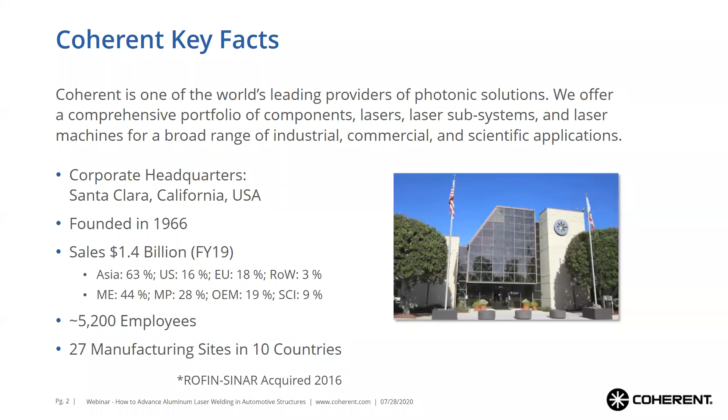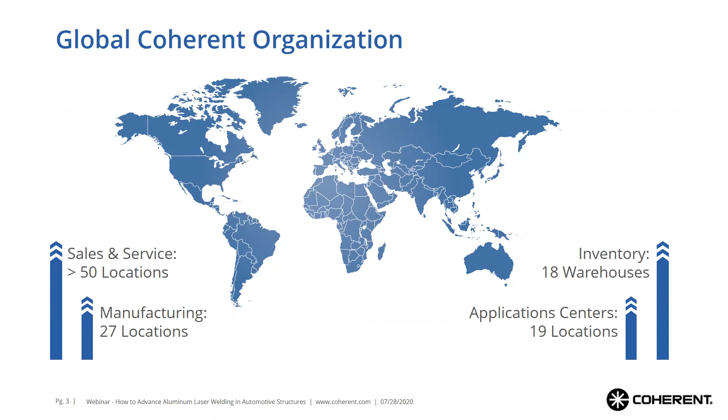So, as I mentioned, we are a large global organization with sales and service located throughout the world with over 50 locations. We currently have inventory warehouses scattered throughout the world to provide spare parts as well as consumable support, as well as 19 application centers located globally. Getting into a bit more detail with regards to these application centers, here in North America, where JP and I are both based, we have 3, we've got 10 over in Europe, and 6 throughout Asia. We perform well over 2,500 applications annually for our customers with over 75 engineers.

The goal of these applications is to provide support to the sales team to make sure that the correct equipment and processes are being selected, as well as helping out both pre-sales as well as after sales. Right, and this also is a location where we prove out our latest and greatest technologies that we are bringing to the global customer base.

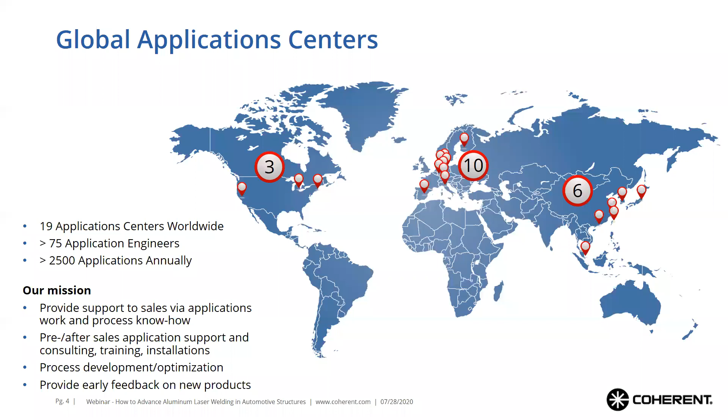Within Coherent, we can cover all aspects of your needs for a laser. So there's the initial sale and support from the applications lab. We have extensive field service that will go out and help you during your install, setup and maintenance of your equipment, spare parts and logistics, technical support. So we're full Industry 4.0 with capability for remote diagnosis, as well as extensive training classes, both at our facility or on-site at your facilities.

There are 4 basic core markets that Coherent works in. There's microelectronics, material processing, OEM components and instrumentation, and then government and scientific research.

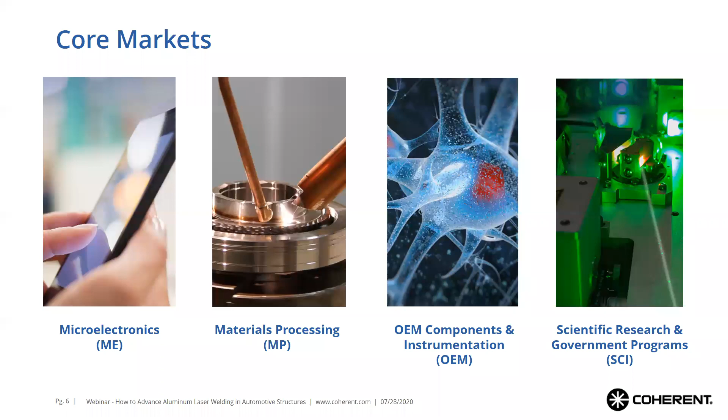Right now, our largest market is microelectronics. We are growing our material processing, and we are considered number one in the market segment for OEM components and government research. What makes Coherent a bit unique compared to many other laser companies is not only the markets we play in, but also our product offering.

In this chart on the left, you can see we offer all sorts of laser technologies, from gas lasers, diode lasers, solid state lasers, fiber lasers, down to full systems. Across the various core markets we work in, we have multiple solutions. When you come to Coherent, we help make sure the correct technology and process is selected. Especially with new materials, there's more than one way of accomplishing this goal, but working closely with the customer, we can tailor the solution to meet all your requirements.

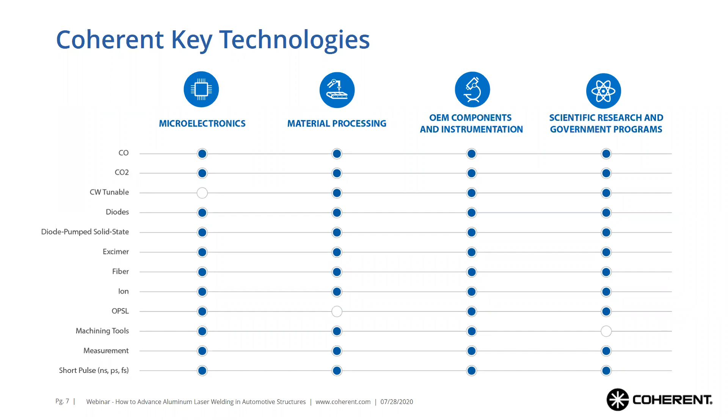What's key here is process and application knowledge is critical. That ties back into our applications lab, where we have the experience and knowledge that we can pass on to our customers.

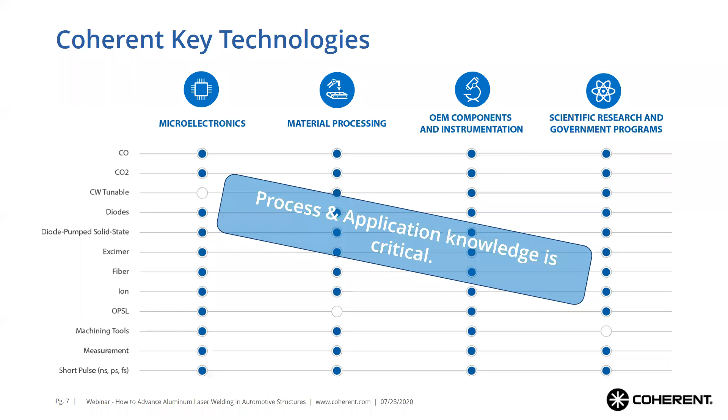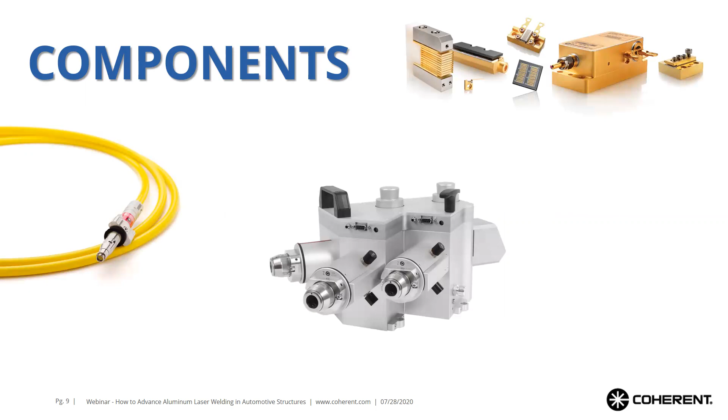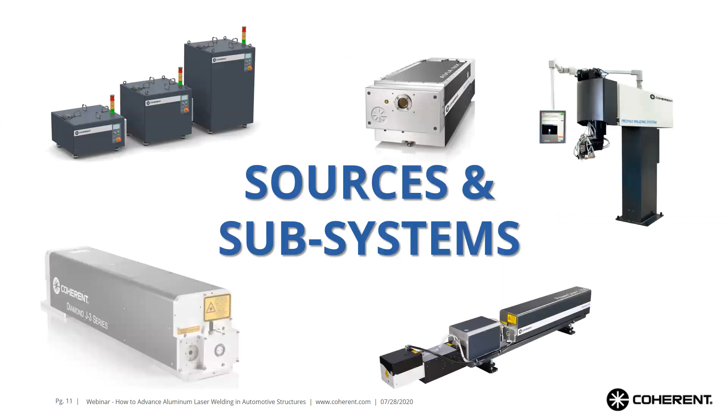With this broad portfolio that we offer, here's some examples. Down at the components level: individual diodes, fiber delivery, switches. We offer the individual components. We also offer sources and subsystems - individual lasers, lasers with optic delivery that can be integrated into a larger line, as well as complete turnkey systems.

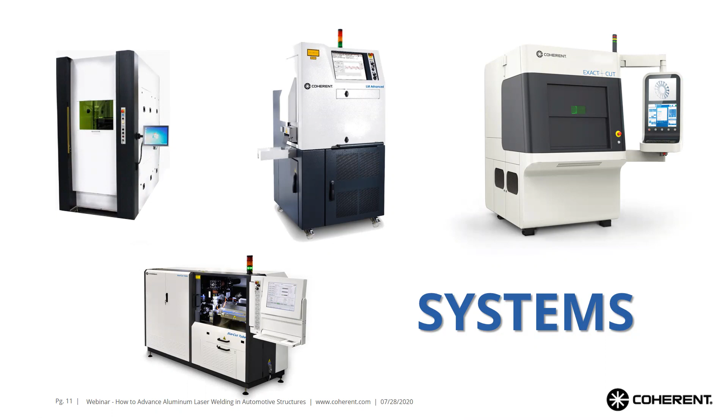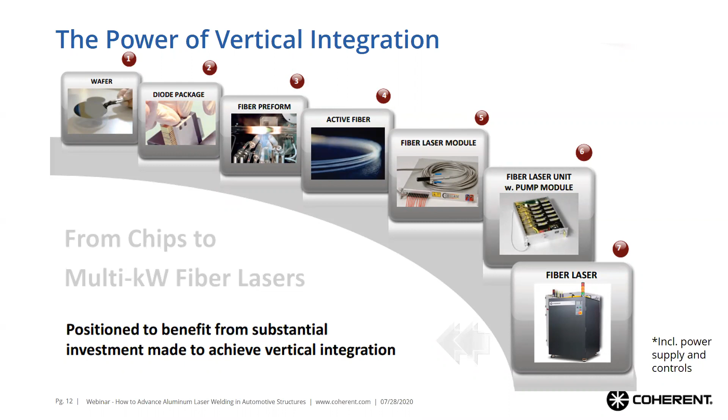Today, we're going to specifically be highlighting our latest advancement in fiber lasers, which is the adjustable ring mode fiber laser. What's unique about this laser is the combination of two independent individual beams, one in the center or core and one on the outer ring, to create this.

What's unique about our systems is it is completely independent. Think of it as two individual lasers spliced into one. You have complete independence to control them individually. I'll get into some more detail and examples of that shortly.

In general, our standard lasers are available with power up to 10 kilowatts total. We can do larger by special request. What's unique about our fiber lasers is we have closed loop power control, so what we say we're delivering is what we deliver. We can do that all the way from 1%, so down in the hundreds of watts, all the way up to full power of 10 kilowatts.

And we can change and manipulate that power level at a speed of up to 5 kilohertz. We do not use any free space optics to combine these, so all the settings can easily and rapidly be changed just at the laser source. Our fiber lasers are also insensitive to back reflection, as well as fully compatible with all the standard process optics and scanners out in the market today.

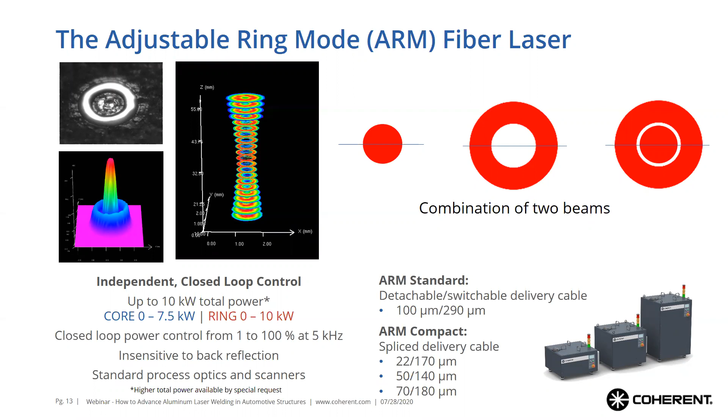What makes the ARM laser unique, and how will it improve your welding? The key is basically 3 steps. You have the large outer ring, which preheats your material. That helps shift the absorption, improves the efficiency of the coupling, which gives you less thermal gradient, so less thermal damage, as well as reducing your spatter.

The high brightness, smaller center or core generates a very stable keyhole, providing uniformity in the depth and overall process improvements. And then finally, that ring also helps stabilize by maintaining the weld pool longer. So it gives you additional heat to reduce the cooling rate, which helps improve your process window. This is especially important with very crack sensitive materials such as 6000 and 7000 series aluminum, which JP will be talking about in some more detail.

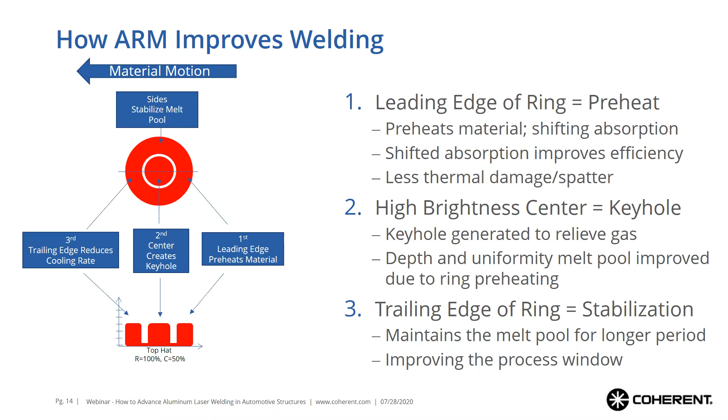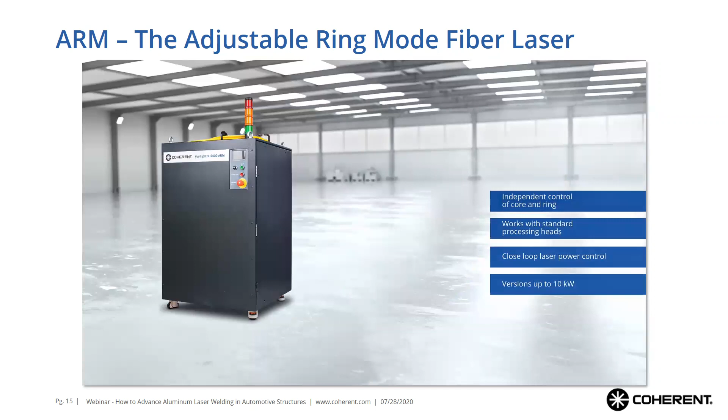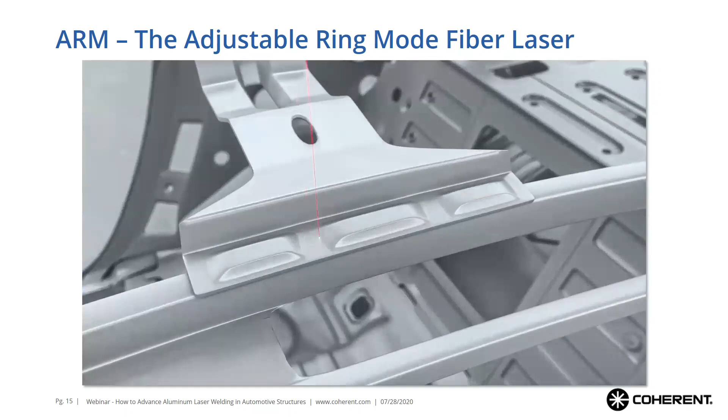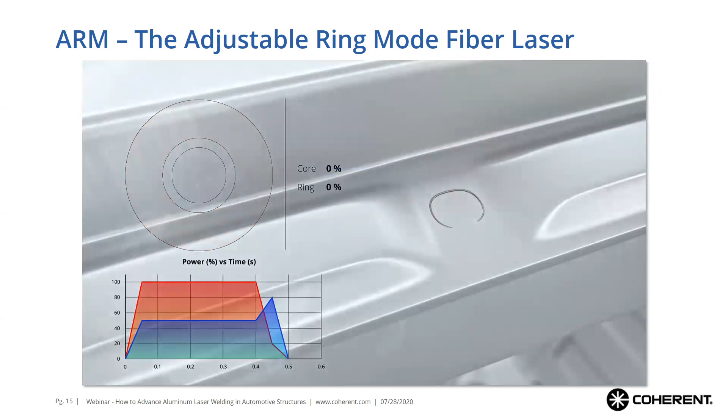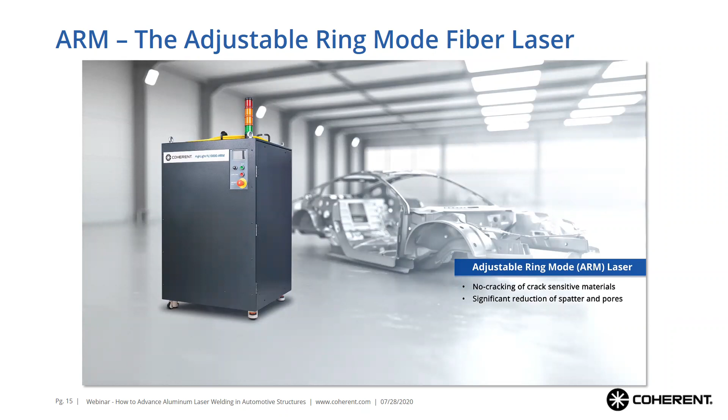Next, we're going to demonstrate an actual application on a vehicle. This is an example of a remote weld, which is very common in the automotive industry. You can see from the chart on the left, at the start, you can ramp them individually. Then you go into a steady state mode. And a lot of the problems occur at the tail end of the weld. You can ramp them down individually to avoid issues in your weld termination. In the end, you can eliminate the cracking, and you can have a significant reduction in spatter as well as pores.

Where have we used this in production? I'm proud to say that the new 2021 Hyundai Genesis G80 and GV80 aluminum doors are welded remotely with our ARM fiber laser. We have applications as well in production doing aluminum powertrain components, battery components. We're welding titanium heat exchangers, stainless steel tube mills, as well as a lot of copper welding. Unfortunately, we're very limited in what we can say in terms of actual OEMs due to NDAs, but rest assured that we also have applications coming in steel welding, high strength steel welding, as can be shown from this image.

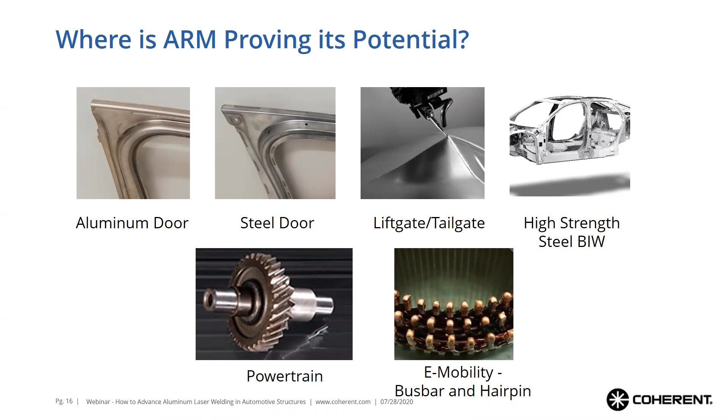So now I'm going to be passing it on to JP, and he will be talking about specific applications with regards to aluminum materials that we've done in our labs for various different materials, sheets, extrusions, castings, and various configurations, as well as examples where we've collaborated with outside labs as well as key automotive suppliers for secondary validation of our technology. With that, I hand you over to JP Lavoie.

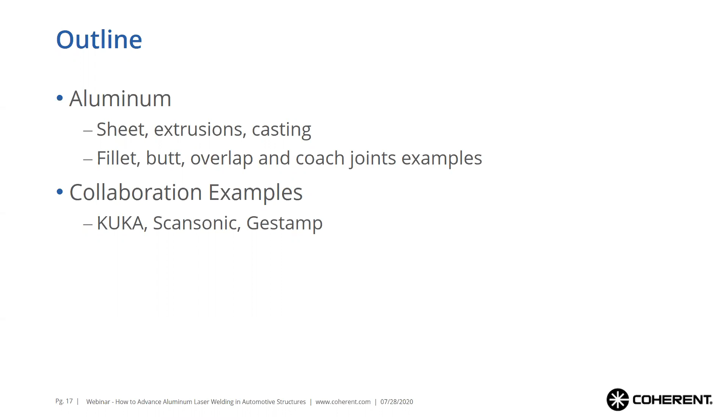Thank you, Mark. As Mark mentioned, we'll be talking about some of the applications in aluminum. Let's start first with the different challenges that we're seeing. There's a lot of challenges welding aluminum. There's a high demand in welding 5 and 6,000 series, especially components for automotive. The OEMs are always asking for continuous welding if possible, as wire is great, but it does bring also some limitations sometimes in speed and complexity, as well as being able to eliminate hot cracking issues.

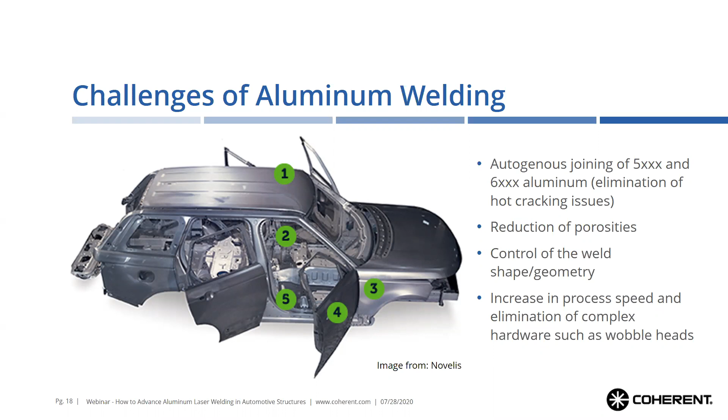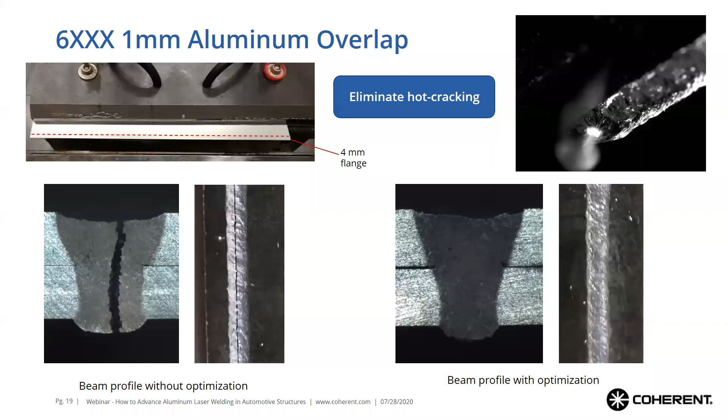Additional stresses lead to centerline cracking, as observed in the bottom left image. On the right side, this is done with our ARM fiber laser in an optimized beam profile. You can see that a weld 4 millimeters away from the end of the flange does not lead to any cracking. We've also been able to go even closer than 4 millimeters from the edge without cracking. This can help OEMs and manufacturers design their flanges differently and save material by not needing such a long flange.

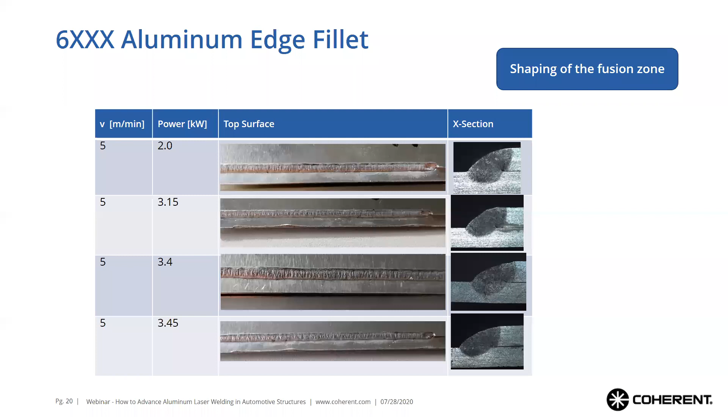What's interesting on the right side is you see the filler material being added, and on some of the frames you can clearly see the ring beam, the center core and the ring around it. I think you'll see it when the video replays here. It will play one more time. There you go - you can see at the beginning, very clearly on some frames, the center beam and the ring around it. That's quite interesting to see.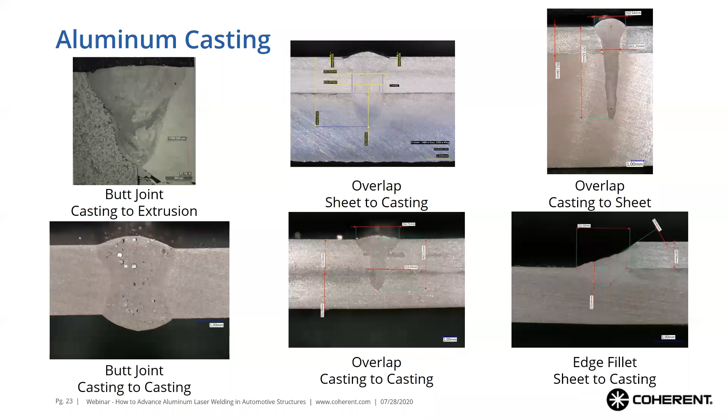Just to show you, this is a study done by KUKA at their development center here in Sterling Heights, Michigan, where they used a 1.3 millimeter top sheet 5000 series aluminum, and they welded it in an overlap configuration to a 1.5 millimeter bottom sheet 6000 series aluminum. This was done with a II-VI RLSK remote head, and they kept their travel speed at 4.5 meters a minute. This is a linear travel weld with no oscillation, we should mention.

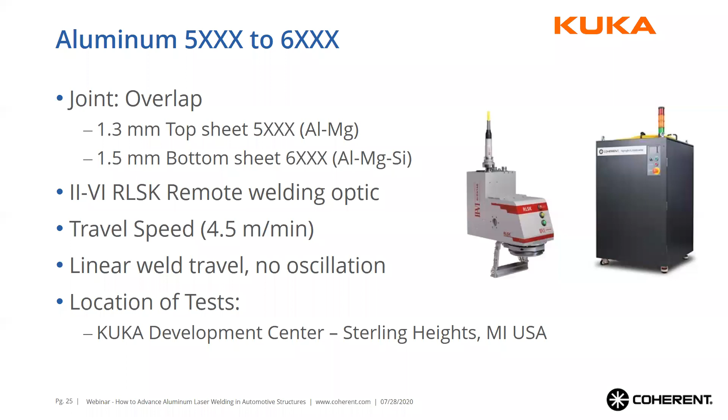What they observed is that on the left side is what you typically see with a standard fiber laser sold on the market. You'll have either a top hat or Gaussian mode fiber laser on the left side. Out of a 200 micron fiber, you see there's a lot of micro cracking visible on the surface. On the right side is done with the ARM fiber laser with an optimized ring to center ratio. You see here they used a ring to center power ratio of 1.55, which turned out to be their magical ratio for this specific configuration, and you see no cracking.

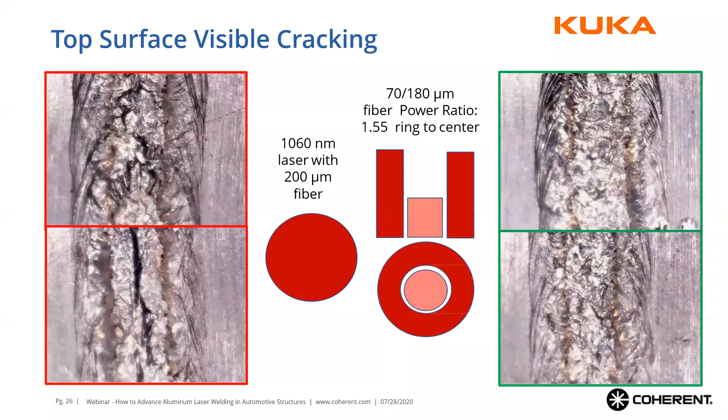Beautiful weld. Now looking at the longitudinal cross-section of these two welds, you see on the left side the standard fiber laser shows a lot of porosities, especially near the bottom of the weld and the root where you'd expect to see it. And on the right side, very little porosities for the ARM fiber laser weld.

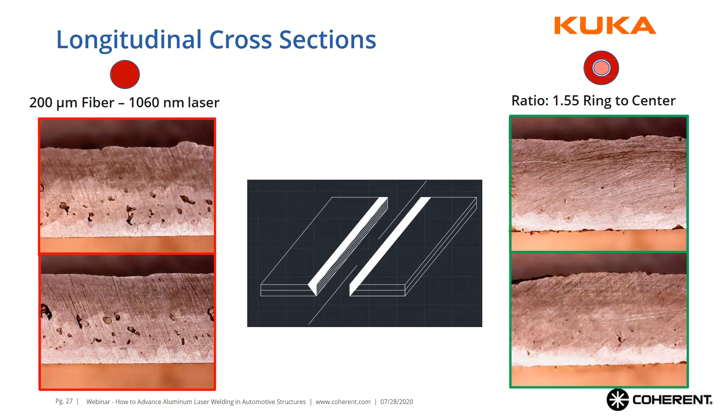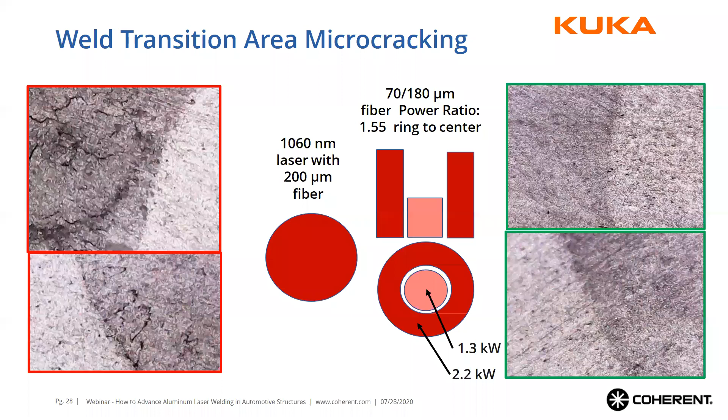Looking at the microstructure of these welds in the transition zone going from the weld into the parent material, you can see on the left side again the regular fiber laser showing a lot of micro cracks, whereas you can see the smooth transition on the right side with the ARM fiber laser, and no micro cracking is visible.

Then this shows you also a similar study where they were doing a flange reduction study. The left image shows you the standard fiber laser at 6 millimeters away from the edge of the flange. See that again, the heat builds up on the end of the flange, and you see micro cracks and cracks all over the place. On the right side, they did the study 4 millimeters away from the edge of the flange, from the center of the weld to the edge of the flange, and you see no cracking again. So they confirmed the same results that we had in our lab.

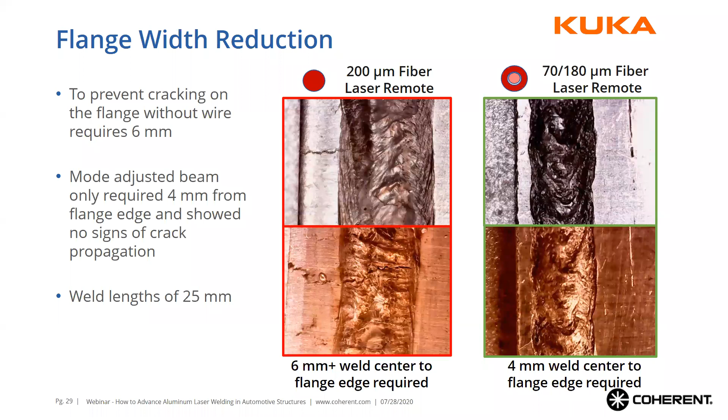Here's another study done by Scansonic in Germany at their application center, where they used an 8 kilowatt ARM fiber laser and their RLW-A head with a 2.9x magnification. We should mention that this process head, as well as virtually all of the commercially available heads, take Precitec, take the RLSK heads, now have dual control integrated so that they're fully compatible with our ARM fiber laser series, where we can control the center core and the ring independently. So all these heads and their software are compatible with our system.

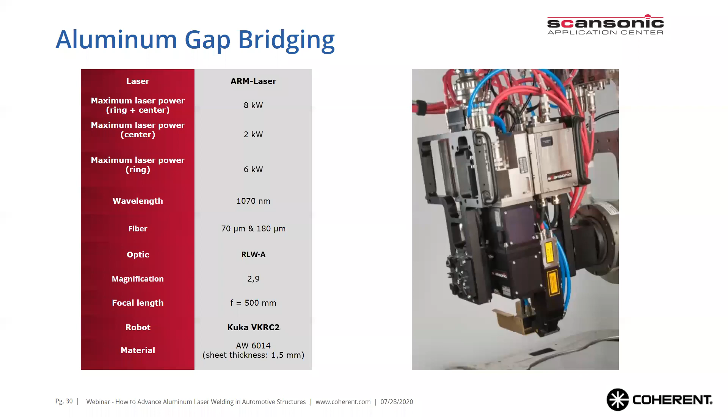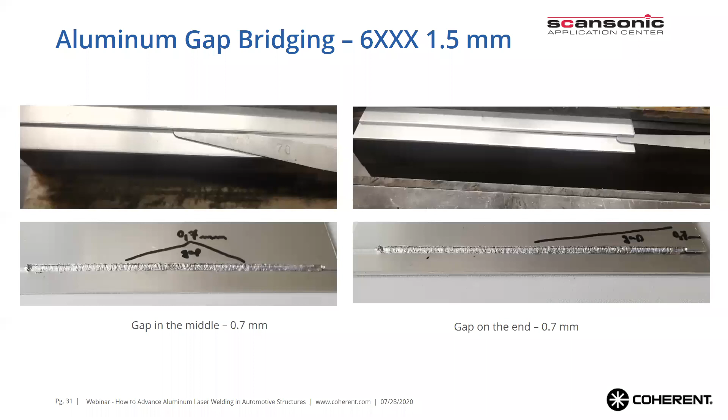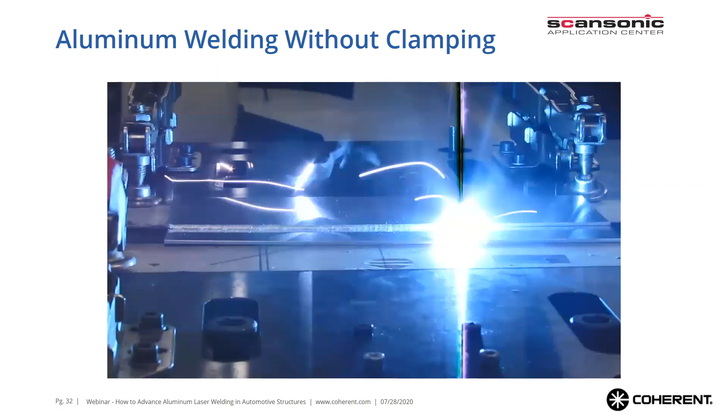Now, this is very interesting in that you're looking at the same fillet weld, but here with no clamps applied. So the material is essentially just laid on top of each other like this, and you can visibly see that there's a huge gap in the center. And what's interesting is when the laser is turned on, it is automatically being adjusted, and you can see that this part is essentially warping and moving, but the beam and the laser parameters are automatically adjusted to get a successful weld. So very interesting.

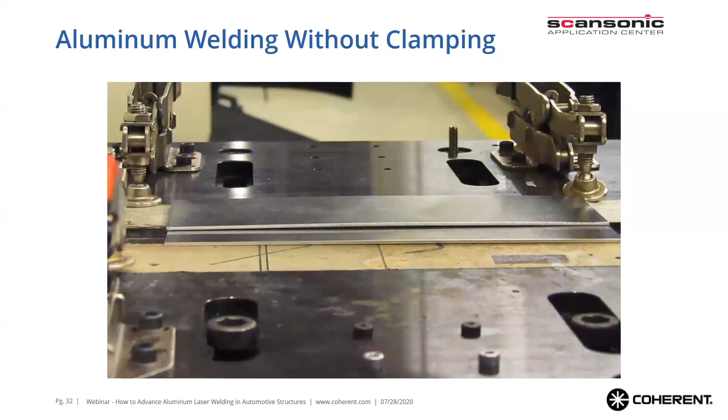Next is Gestamp, the R&D center in Michigan, which also did some work with a Precitec weld master head. They had a pretty interesting setup. In the center image there you see the Precitec head with all kinds of different sensors and options, and on the right side it was mounted on the KUKA robot. They use essentially this head, which is again compatible with the ARM fiber laser for both center and ring beam

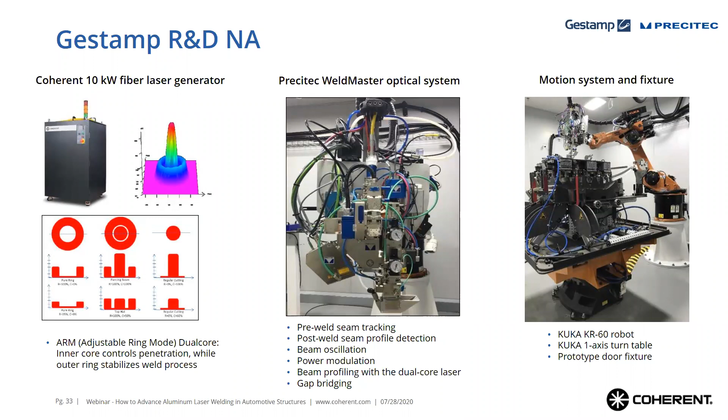control, to do a door welding application where they were welding 6,000 series outer skins to 5,000 series. You see on the left side the image of their setup, and on the right side the red line essentially shows you the seam that is being tracked and welded. It's a good replacement for tactile welding. This is done remotely with wobble being applied.

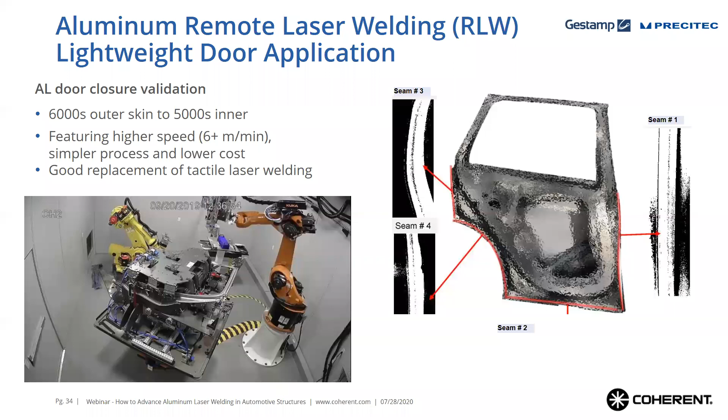However, if you look at the detail of the study, it shows that the speed achieved is more than 6 meters a minute, which is quite interesting results. So a successful application done with the ARM laser in this head.

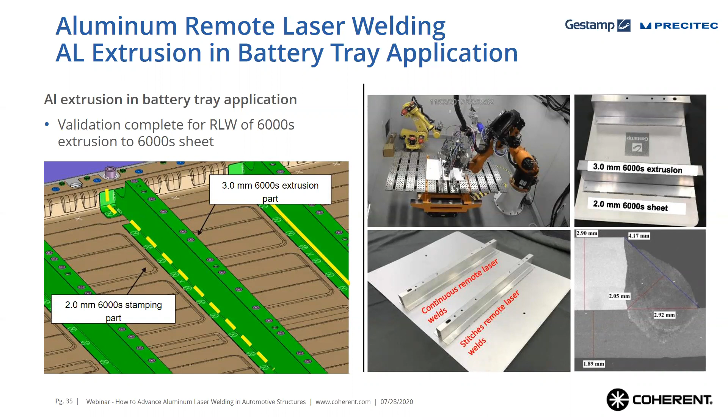Here's another one where they use an aluminum extrusion for a battery tray application. You have a 3 millimeter thick extrusion part in green on the left side in the image there, welded to a 2 millimeter thick 6000 series stamping part. And you can see on the right side the results. They did both a continuous remote weld as well as a stitch weld on the bottom area there. And the bottom right image shows you the resulting fillet weld that they achieved, which was again very successful, done with the ARM fiber laser.

Gestamp took it even further, where they looked at all kinds of different material combinations, whether it is 5,000 to 5,000 series aluminum, which is your top image, to the center image, which shows a 7,000 series aluminum welded to a 6,000 series in fillet configuration, and then the bottom, 7,000 series welded to 5,000 series.

You can definitely see that the center and the bottom welds are a little bit rougher than the top, which you would expect for 7,000 series, but that is an interesting result, that they're able to successfully weld 7000 series to other series, even in 2 mm thickness, which is also pretty thick.

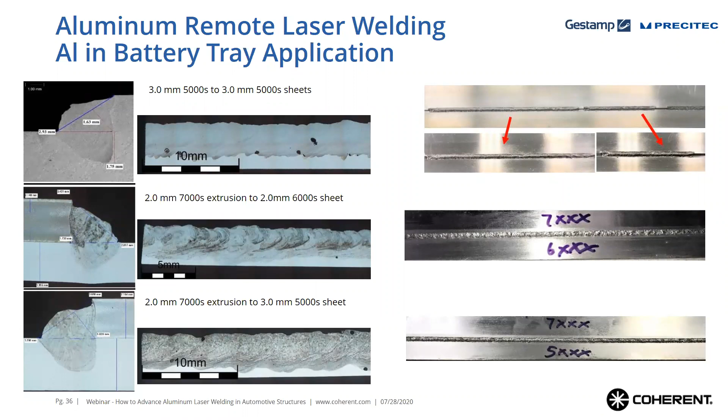So here we go. The first question is, have your ARM fiber lasers been implemented to a global customer base? So, as I mentioned earlier, unfortunately, we can't give you a lot of the details of what customers, but yes, we have numerous ARM lasers out in the field, installed globally for numerous applications. The one specifically I can reference is the 2021 Genesis from Hyundai, the G80 and GV80 aluminum doors. But yes, we have numerous installations globally. Thank you.

Next question. What are the main benefits of ARM fiber lasers over standard fiber lasers? Yeah, I can answer that one. It's a great question. We covered a little bit of that, maybe a little quickly at the beginning, but essentially, it really is a different type of laser system. It does wear the name of fiber laser, but having the ring and core and being able to control independently the ring and the core gives you really a new perspective, a new knob to turn in the lab when welding challenging materials.